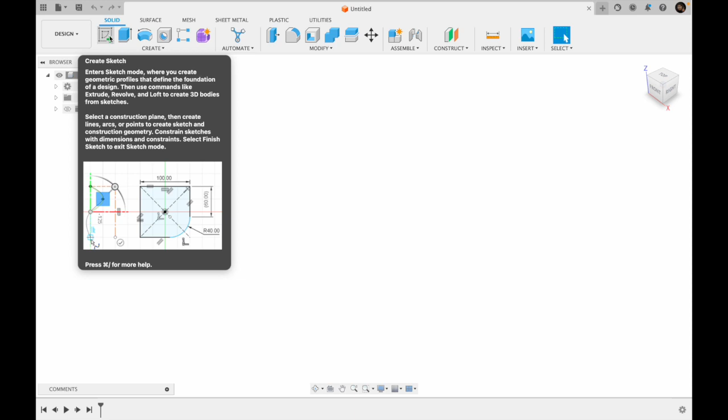The first thing we're going to create is a leg. We're going to start this by creating a sketch and selecting one of the planes. Because I am going to create a taper leg, I am going to create it onto this side plane. I can use lines or I can use 2-point rectangles.

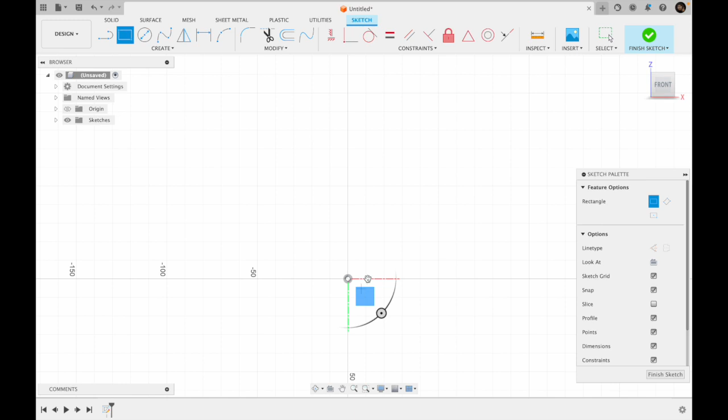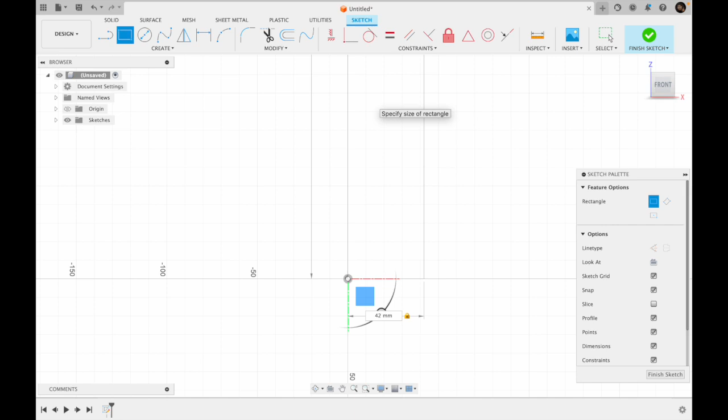So in this case, the leg is going to be 750 millimeters. I'm going to start from this point and take it up. What I can do is type in the measurement so it's a little bit more accurate. So 42, then I press tab on the keyboard, and that transfers me to the next measurement, and then I write 750, which is in millimeters. You don't have to put mm, it's by default in millimeters.

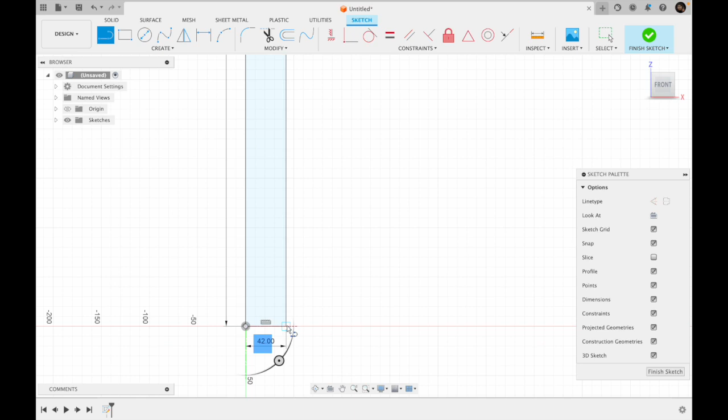Now we have the leg here, but it's going to be tapered at some point. So one way to taper it is to make a decision on how much we're going to taper this. I'm going to click on the corner and then click again at 15 millimeters, and that's going to be my first point of reference.

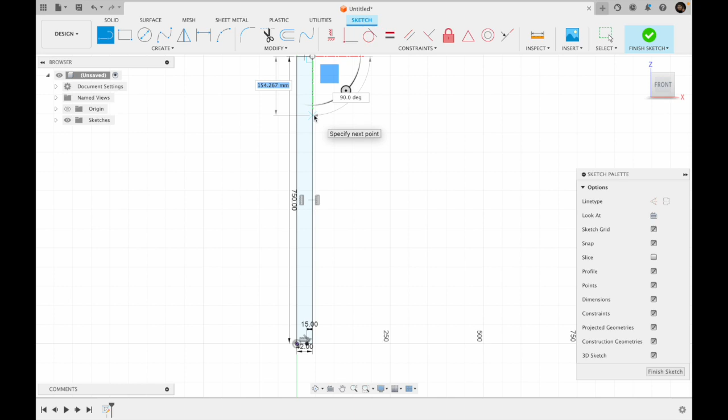And then I want to start the taper from the top at about 200 millimeters. So I'm going to write 200. So I have these 2 points of reference, and I'm going to trace a straight line from that initial point from the top to the bottom, or vice versa. Once I have done this, I press finish sketch, and then I have this section, which is the section that I'm going to be extruding.

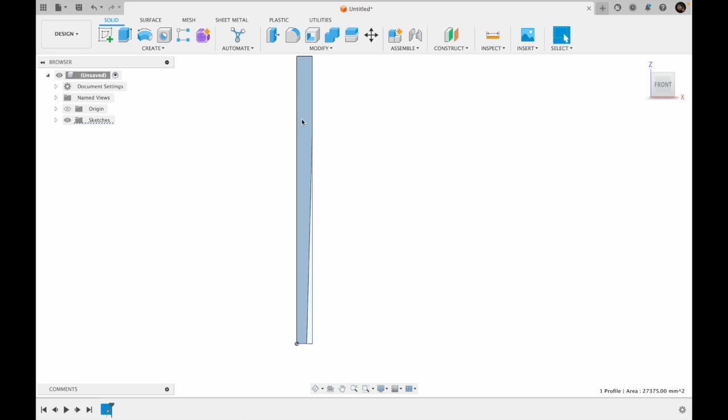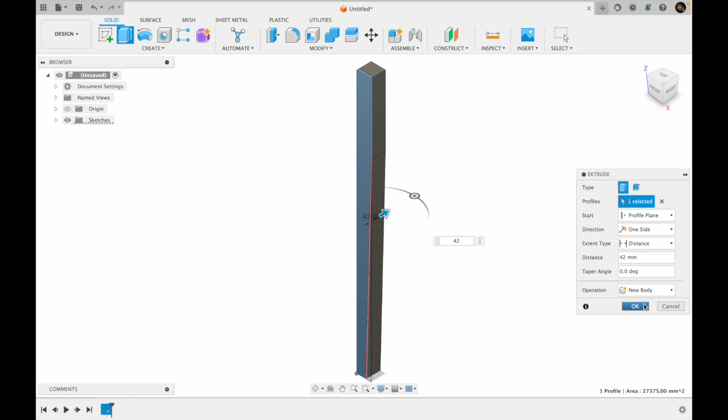I'm going to go to the right hand side, close to the navigation box. I have the default isometric view, so I'm going to click on that, and then I'm going to press the extrude shortcut, or you can press E on your keyboard to activate this option. So the legs are going to be 42 by 42. I'm going to type in here 42 millimeters, and that's going to create a new body.

Nice. So once I'm at this stage, I can save it. So I'm going to save it, very important, and give it a meaningful name. This is going to be the leg, and then save, and then double check that the location is hallway table.

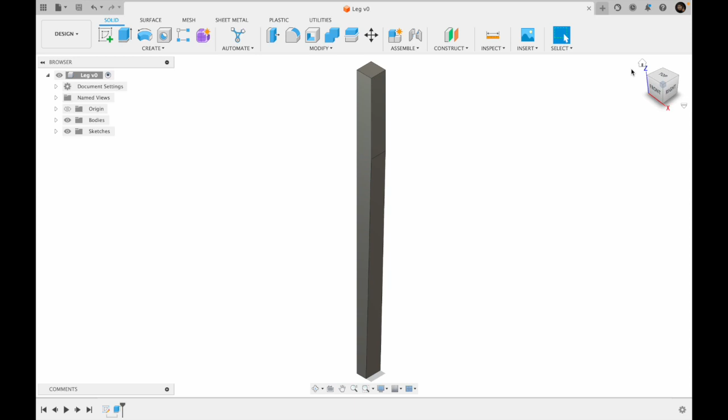Right. So now I can see that it's tapered on one side, but it's not tapered on the other. So I'm going to do the taper for those other two sides. I am going to taper this leg on either side at 5 millimeters.

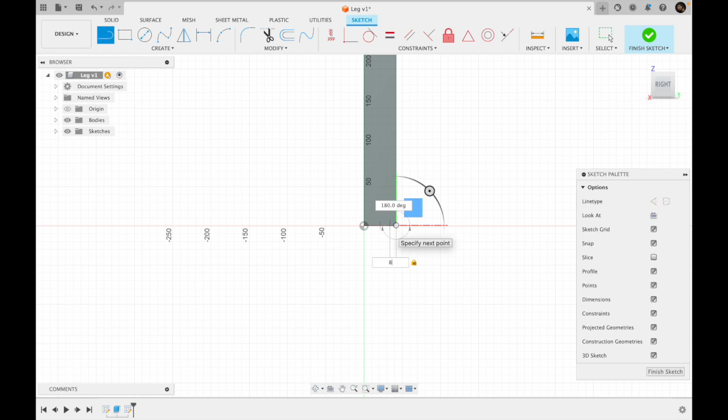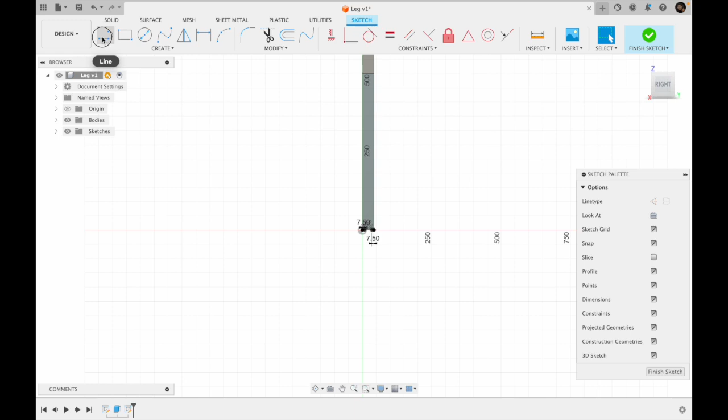So I'm going to select this plane. I'm going to click in the corner, and then it's going to be 8 millimeters, or 7.5, which is half of 15, and then I'm going to do exactly the same for the other side, 7.5 millimeters. Make sure you zoom in as best as you can so you know where you are creating this. Now I'm going to go from the corner top to one of the bottoms, and then from the other top corner to that internal bottom, and then that's it.

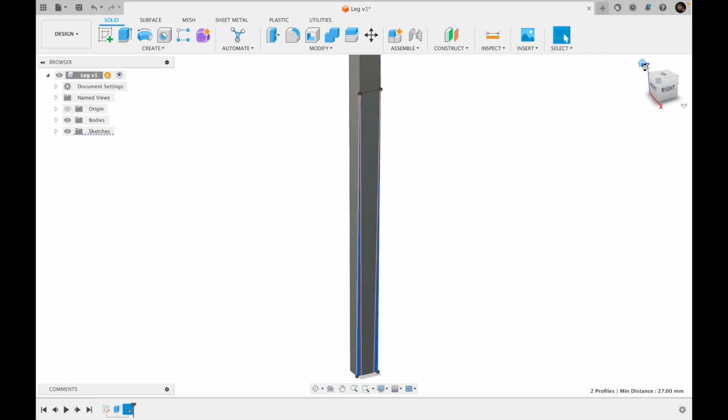Finish the sketch, and now I'm going to select this section and this section. I'm going to go to the isometric view and then extrude, and extrude those right through and then cut. And now I have the leg that is being tapered properly.

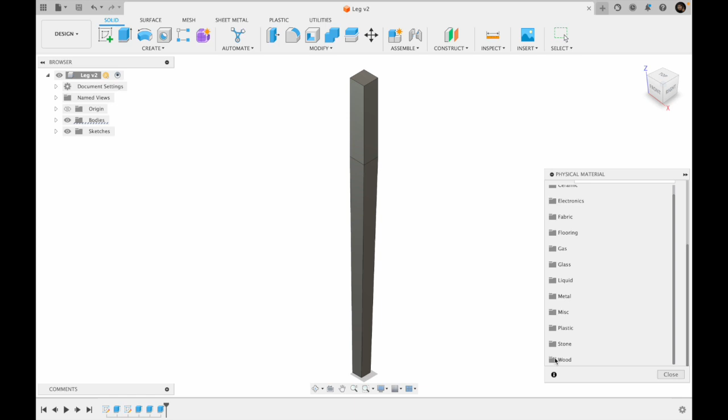So now we have the leg. We press Command S to save, just press OK, and then go to modify physical material to apply materials. So there is a set of materials there. We're going to click once on the folder that says wood, and then we're going to look. In this case, I'm going to use pine radiata. So I'm going to click on it, drag it, and drop it on top of the leg.

And that's my leg done. Okay, so if we go into the data panel, we can see that inside the hallway table project, you have the leg there.